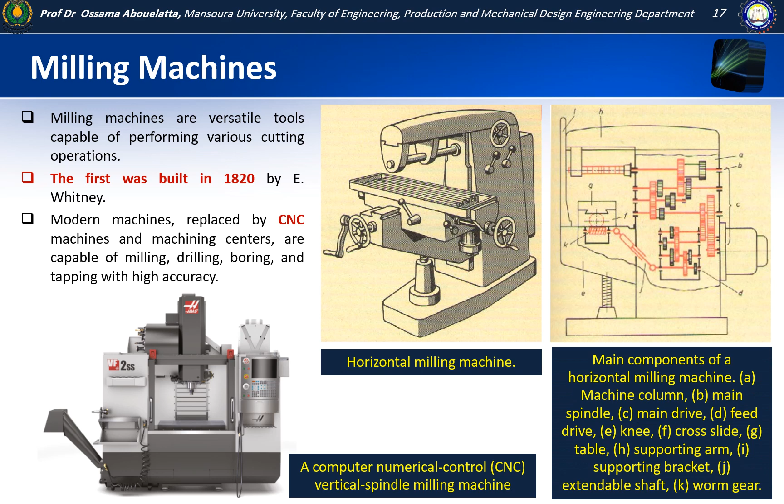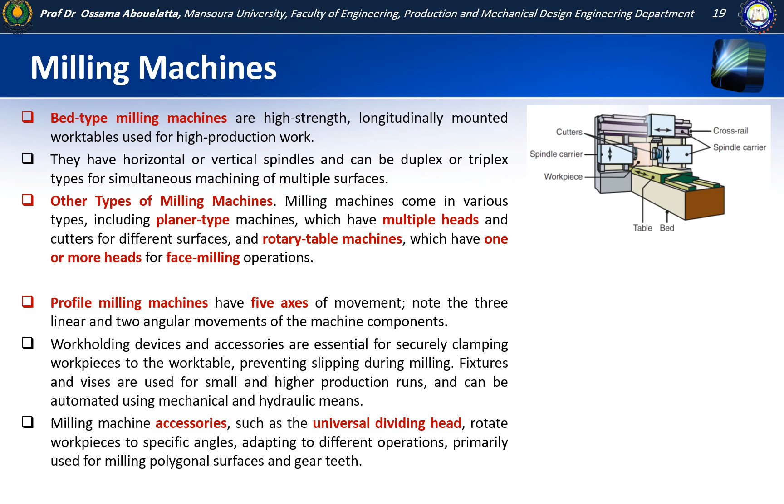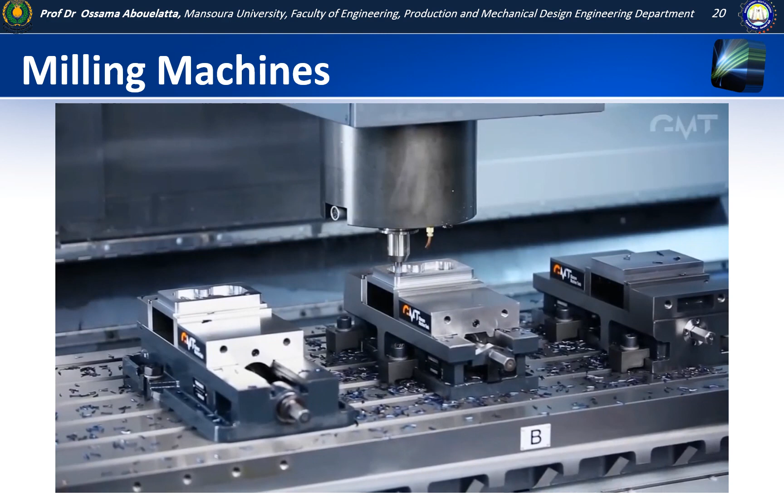A milling machine is a machine tool with a rotating cutter, typically used to shape, slot, and drill solid metal workpieces. Most machines have three axes of movement, X, Y, and Z, the same as those of the Cartesian coordinate system.

On a manually operated conventional milling machine, the milling table can be moved side to side along the X-axis using one of two hand wheels.

The table sits on a structure called the saddle, and together can be moved transversely along the Y-axis. The spindle, which holds and rotates the cutting tool, is housed in the milling head and can be moved vertically along the Z-axis.

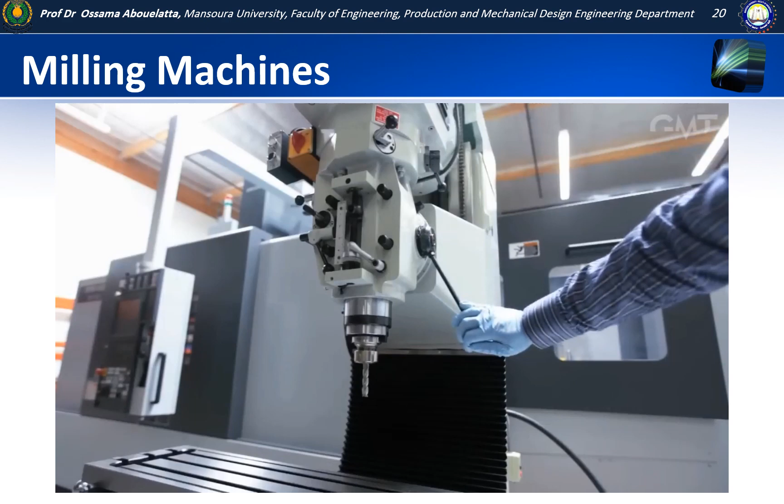Z-axis movement can be accomplished by moving the entire head vertically along the column. Alternatively, a lever-operated quill can provide rapid vertical movement for operations such as drilling.

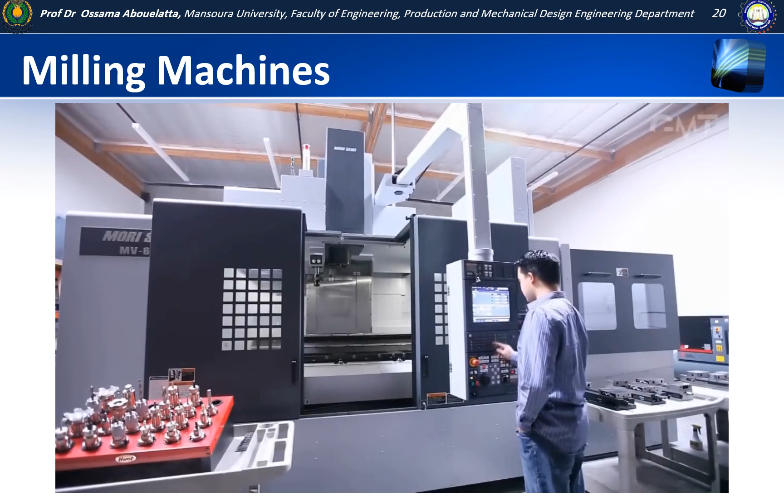A vertical machining center, or VMC, is a computer-controlled CNC milling machine. Movements are very similar to those of conventional milling machines, with the table moving along the X-axis, the Y-axis, and the spindle head moving vertically along the Z-axis.

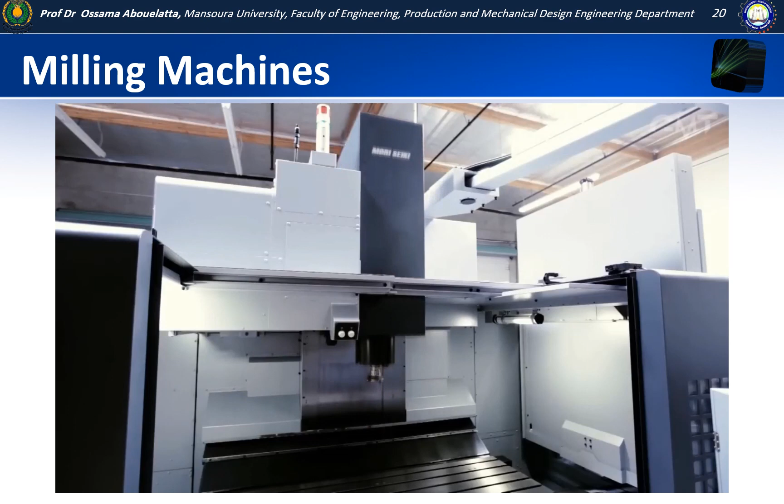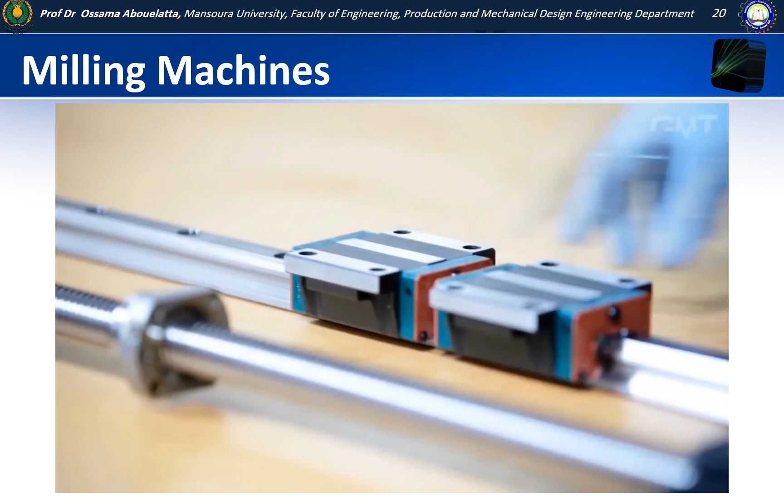Machine structures such as the table, saddle, and milling head slide along a set of rails. Some machines use linear motion guides, which are low in friction through the use of circulating ball or roller bearings. Other machines use cast iron box ways, which can be more rigid at the expense of added friction.

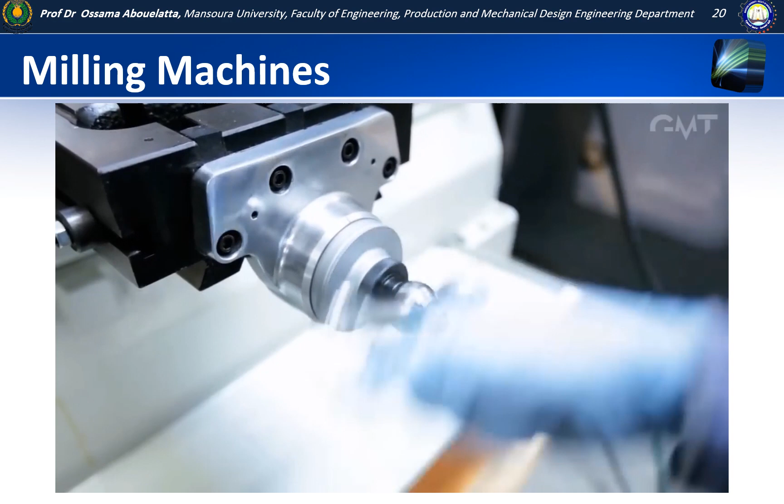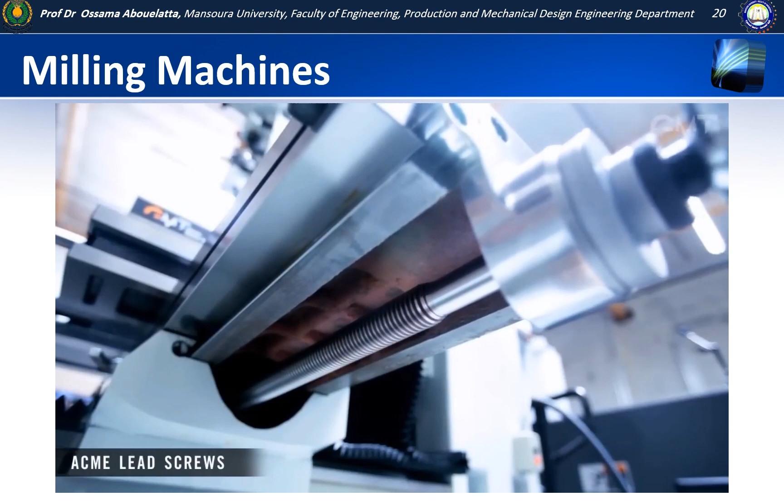Hand wheels are used to apply power for axis movement on manual machines. Highly accurate servo motors are used to apply power on automated CNC machines. Lead screws, such as the Acme screw on this conventional machine, translate rotational movement into linear motion.

CNC machines use ball screws and ball nuts. Ball bearings which circulate within the ball nuts reduce friction while increasing accuracy.

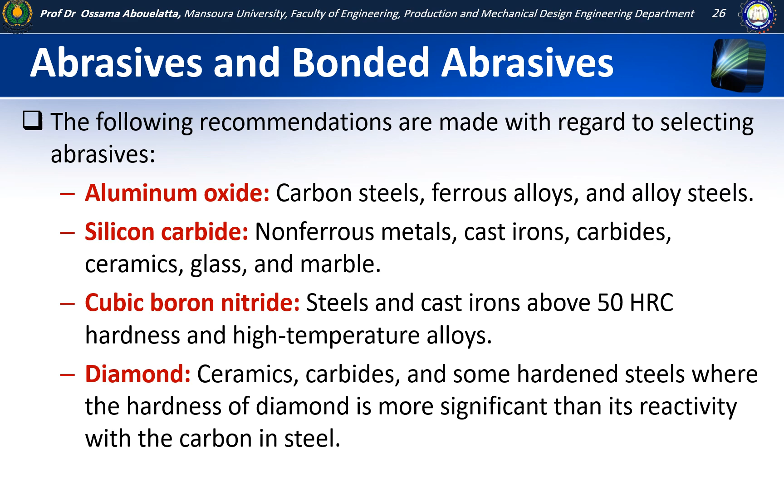Grinding. What is the grinding process? The grinding process is a method of material removal, using a grinding wheel or a grinder as a cutting tool.

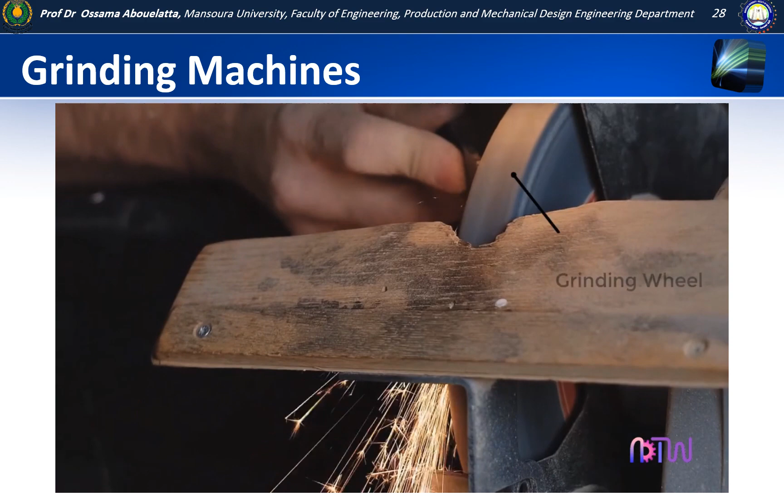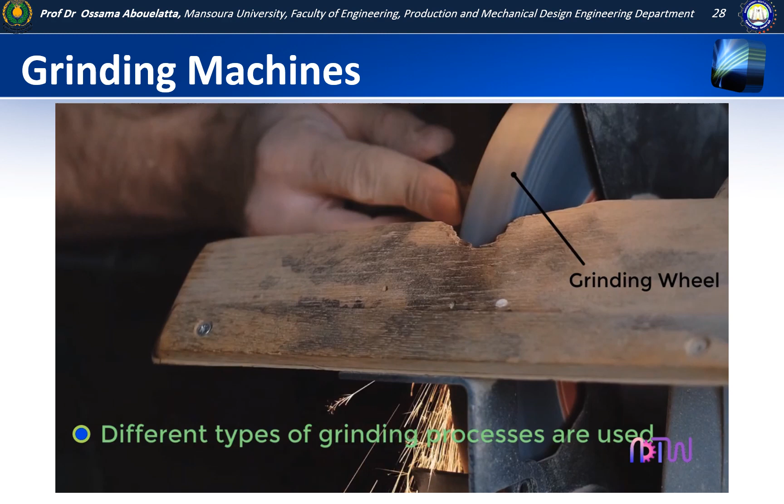Different types of grinding processes are used in industries for material removal purposes. There are different types of grinding machines available, classified based on their construction or type of surface produced, such as bench grinding machine, surface grinding machine, cylindrical grinding machine, centerless grinding machine, internal grinding machine, and special purpose grinding machine.

In this video, we will see the construction details of the bench grinder and the surface grinder, which are most commonly used.

Construction details of the bench grinder. This grinder is called a bench grinder because it is used by placing it on a bench. The size of this grinder is small and it is used for small purposes, such as the sharpening of small tools like a single-point cutting tool.

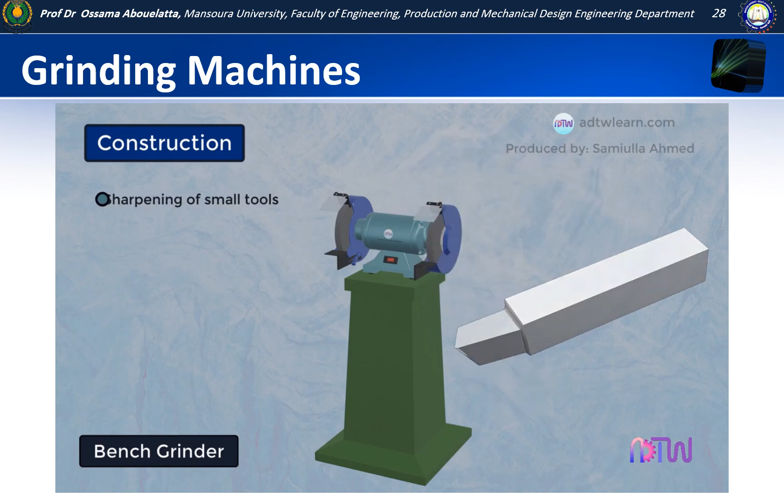Parts of bench grinders: the base, which supports all other components of the machine. The motor is the most essential part of the grinding machine. It is mounted on the base, and it provides rotation to the grinding wheel, and the working capability of the grinder is determined by the horsepower of the motor.

Horsepower of the motor affects the number of revolutions per minute of the grinding wheel. The higher the RPM, the faster you can finish the job. This is important when you are working with hard materials such as steel.

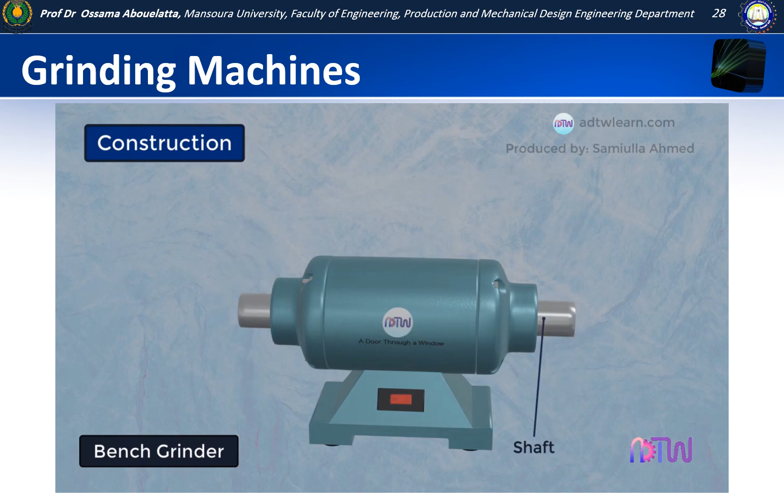The shaft of the motor extends out on both sides. On both ends, the grinding wheels are mounted. The grinding wheels are the ones that will do the actual work of removal of material. These wheels come in different types.

The maximum RPM at which these wheels can be operated is printed on the cover, and this RPM should never be exceeded. Overspeeding can explode the wheel and cause serious injuries or death.

These grinding wheels are made up of abrasive materials, such as aluminium oxide, silicon carbide, cubic boron nitride, and diamond dust based on the requirement. They also have different grits to serve different purposes. One of the wheels mounted on the shaft will have coarse abrasive grains, and the other wheel will have fine abrasive grains.

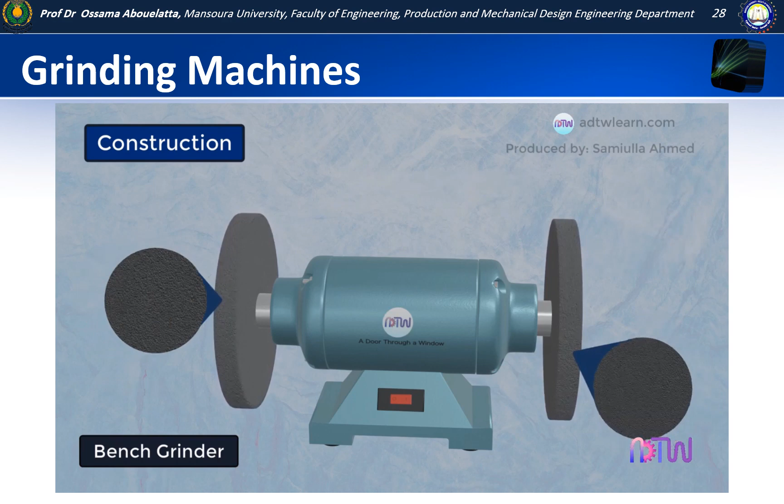On top of the wheels, there are wheel guards provided. These guards act as spark deflectors, and also prevent fragments of an exploding wheel from flying towards the operator. These guards should cover above 75% of the wheels to prevent any object or human hand from accidentally coming in contact.

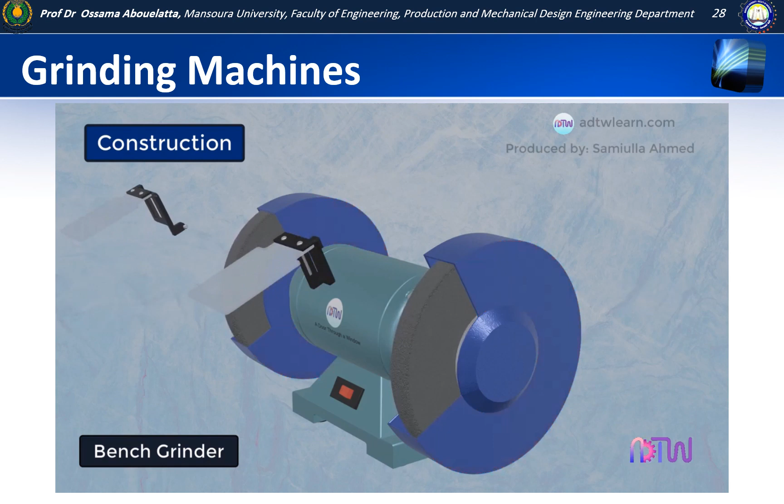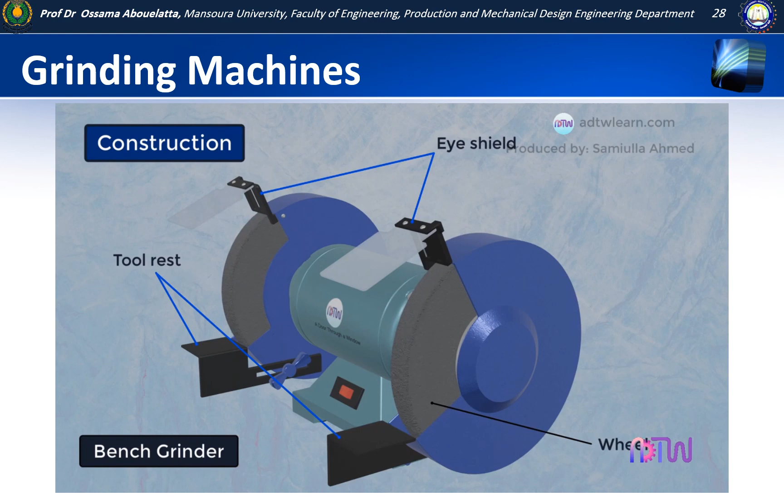Eye shield: this is also another protective feature that is provided to protect the eyes of the operator, and it is transparent. Tool rest is also provided in front of the wheels to hold the workpiece while grinding. It should be tight and should be very close to the wheel to prevent the workpiece from slipping down.

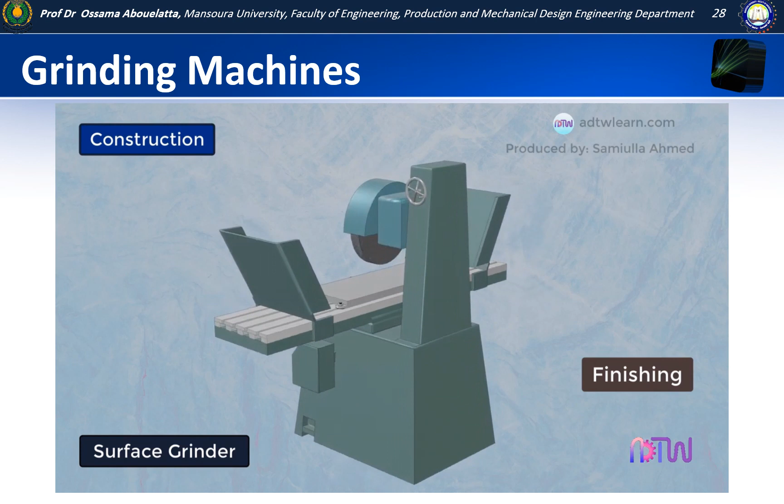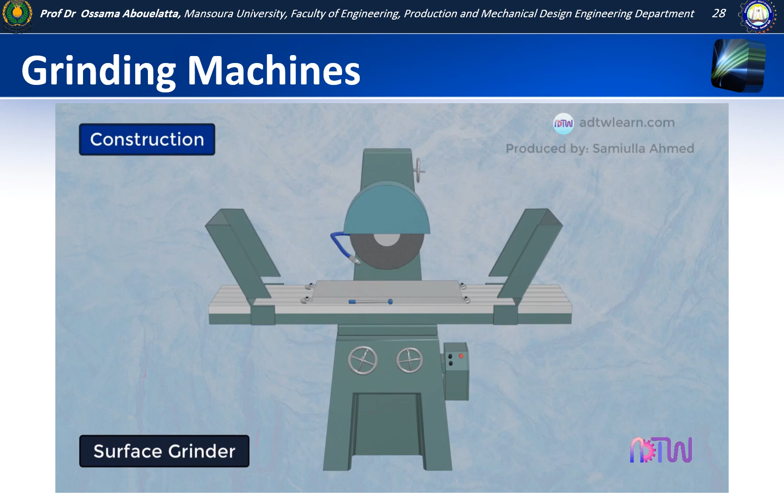Surface grinding machine: this grinding machine is used for finishing, to provide a good surface finish for the workpiece. This machine uses a grinding wheel to remove material from the surface of the workpiece and provide a good surface finish. Construction details: this grinding machine has a base over which the entire assembly is placed, and it also absorbs the vibrations generated during the operation.

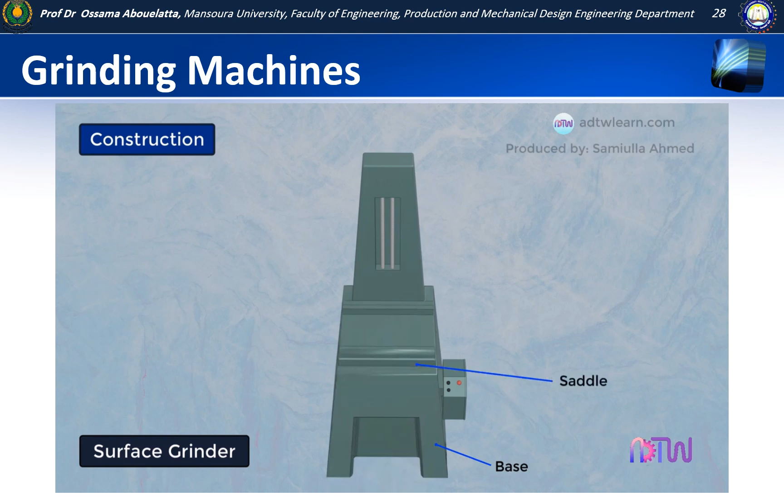There is a saddle that is connected to the base, over which the work table is placed. There are two hand wheels provided.

One is a hand traversing wheel, the other is a cross-slide hand wheel. The hand traversing wheel gives motion to the table in the longitudinal direction, whereas the cross-slide hand wheel provides crosswise motion to the work table.

Work table: the work table helps in holding the job which is to be ground. Above the work table, there is a magnetic table, which magnetizes and holds the workpiece in a fixed position.

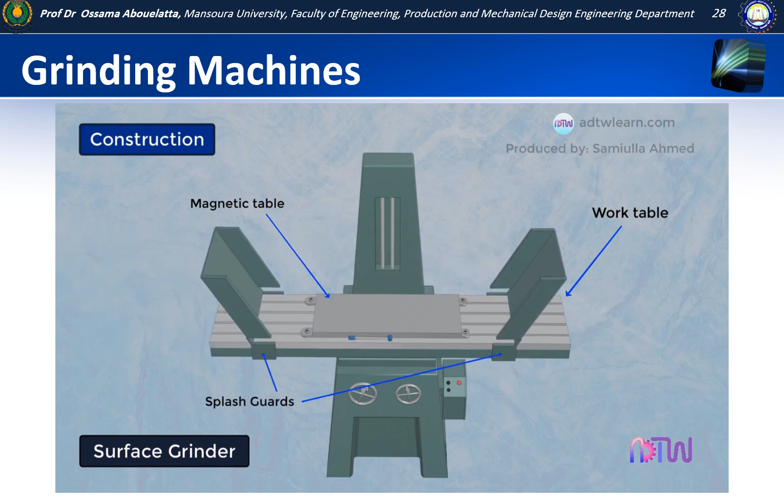These are the splash guards, which prevent sparks from going out and hitting something besides the machine. This is the column, inside which the driving mechanism is placed.

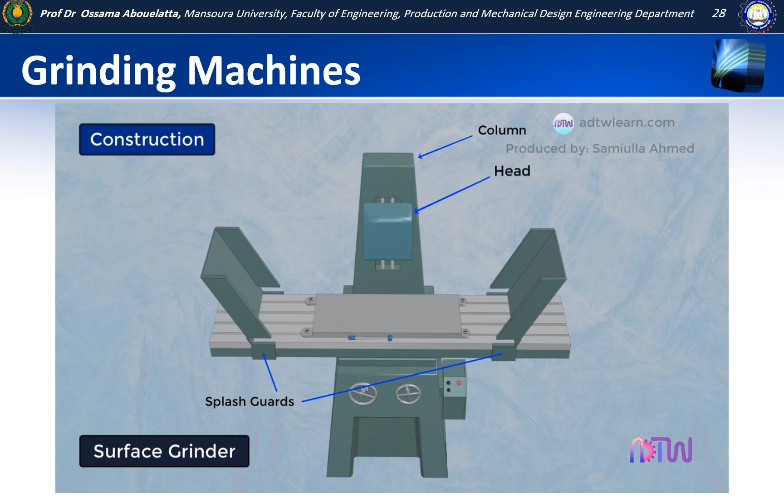The grinding wheel head is connected to the column, on which a grinding wheel made up of abrasives is mounted. This grinding wheel does the actual work of material removal. There is a wheel guard that covers the grinding wheels so that there is no accidental touch during the operation.

This is a vertical feed hand wheel, which gives motion to the grinding wheel head in the vertical direction. With this wheel we can make the head move up and down. It is employed to give depth of cut.

There is a coolant pipe provided that helps in reducing the temperature of the workpiece during the grinding process. The most commonly used liquid as a coolant is water.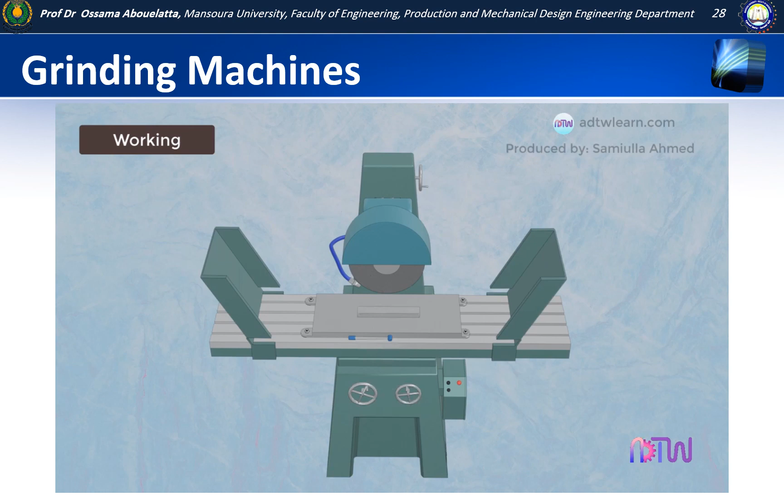Let's see the working of the surface grinding machine. The workpiece to be ground is placed on the magnetic table, and the lever is turned on to magnetize and hold the workpiece rigidly. Now, coolant is turned on, and by using both the hand traversing wheel and cross slide wheel, the grinding of the workpiece surface is carried out.